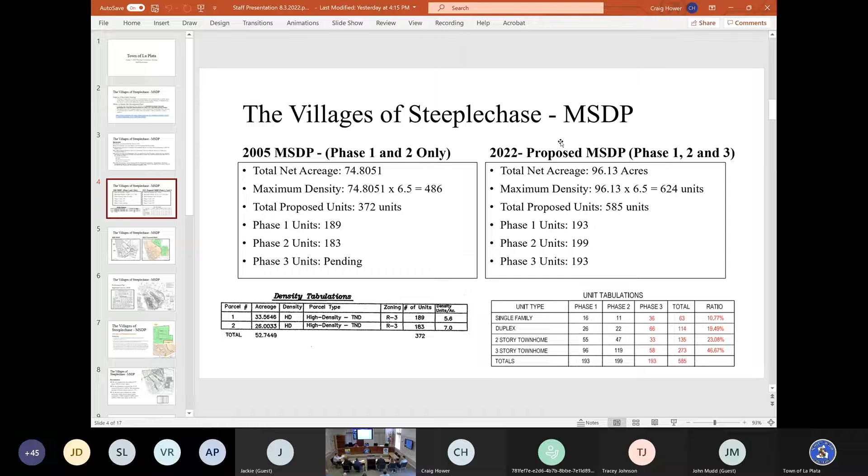Next. So here is just a visual comparison between the 2005 Master Site Development Plan and the 2022. You can see that they did add the 9.48 acres into the overall phase 3.

You show them where that actually is, or Phase 3 is? This is the 9.48 acres, shown in green. This was purchased to make this all one contiguous piece of ground.

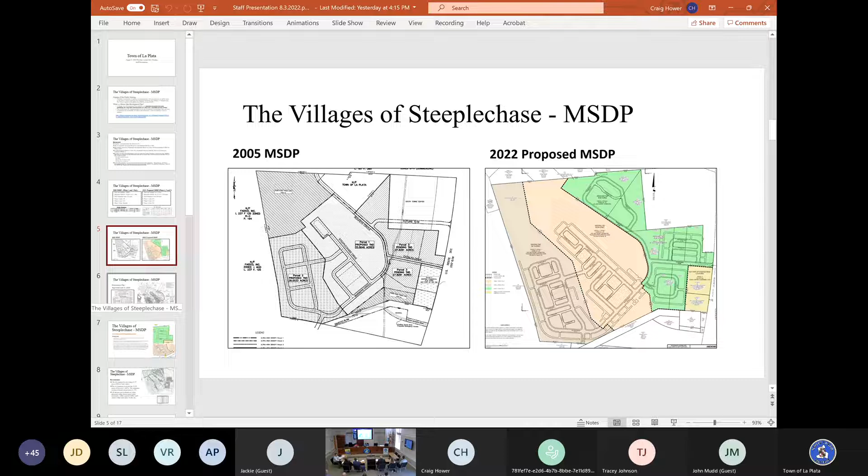Sorry. No, you're fine. There's just a delay with the online. And I don't want to get ahead of anyone that's virtual.

There we go. So this is the most recent preliminary plat that was approved for phases 1 and 2. I just wanted to show the overall, which was approved on June 5th of 2018. So again, it just highlights the 50% rule for the dwelling units and lays out the prior 2 phases.

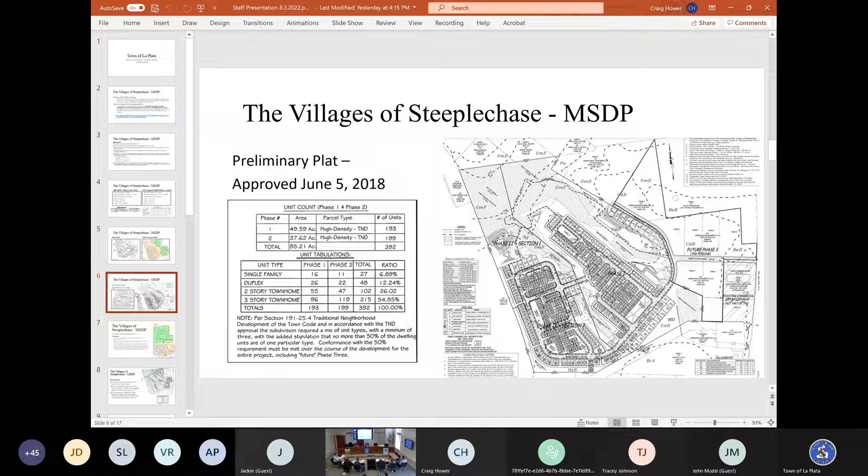It's a work in progress, hybrid meetings, it's all new.

We're getting there. Okay, so for the Villages of Steeplechase, I wanted to highlight a few notes on transportation. For US 301, which is where their main entrance is off of Catalpa Drive, that is owned and maintained by the Maryland Department of Transportation or State Highway Administration, and they have full access or full maintenance over that intersection.

So they are the ones that would decide what could be done with that intersection. We do have interparcel connections proposed to the south through the Stagecoach development. That preliminary plat was approved on June 7th of 2022, and there is an option to connect to the north through the South Towne Centre property. So I've highlighted those 2 properties over on the right-hand side.

The town has not adopted an adequate public facilities ordinance and therefore does not require traffic impact studies at this point in time. If a traffic impact study is submitted, the town would send it to the State Highway Administration or MDOT for review. The state would review the assumptions regarding trip generations, distributions, assignments, along with any internal capture/pass-by trips claimed and determine if any mitigation was required along Route 301.

The town does not have any control over any improvements along Route 301 or Crain Highway. After talking with the State Highway Administration, they do have certain warrants for traffic signals. As was the case for Heritage Green, they generally have about 1,000 units before they would trigger a traffic signal. So with Steeplechase and Stagecoach development, we would most likely be looking at a traffic signal down off of Old Stagecoach Road.

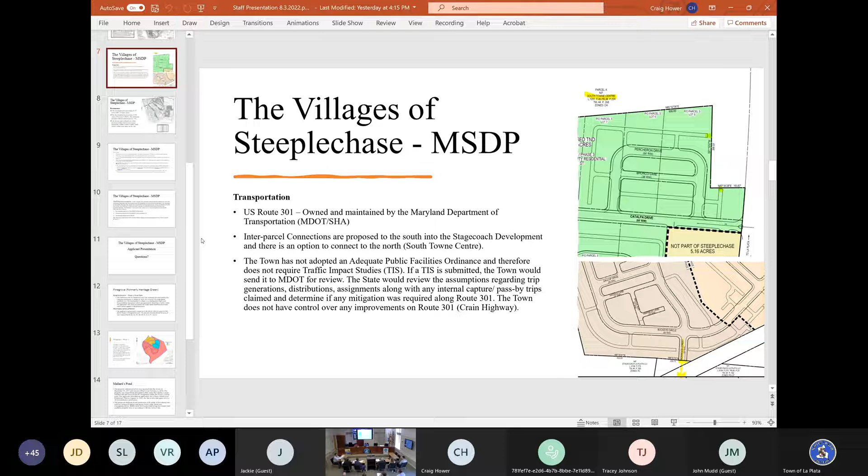And then next, I wanted to talk about the environmental features on the site, and I know that the applicant will provide some additional details as well. But here's an overall view of the site. I've highlighted in green the forest conservation areas, and then in blue the streams that go through the property. So overall, the development is providing 63.97 acres, which is 54% of the overall development as open space.

They are preserving 25.50 acres of forest. That's 21.689%. Per the town's resource protection standards and forest conservation code, the amount of forest conservation required to be preserved is 15%. All the streams and wetlands on the site are being protected with forest conservation easements, or they will be protected with the buffer yards as required.

So the next steps for the Steeplechase Master Site Development Plan is for the Planning Commission, as they can hold the record open for 30 days or close the public hearing. The Planning Commission shall then provide a recommendation to the Town Council. At a Town Council, the Town Council shall hold a public hearing and advertise in accordance with the Town Code and state law. With their public hearing, they will provide the final approval with conditions, or denial of the amended Master Site Development Plan.

If, and I say if, the Master Site Development Plan is approved or approved with conditions, the applicant would then proceed with the preliminary subdivision plat review. That is where we would get into the details of the site, the lot layout, the school seat allocation, the forest conservation specifications, stormwater management, et cetera.

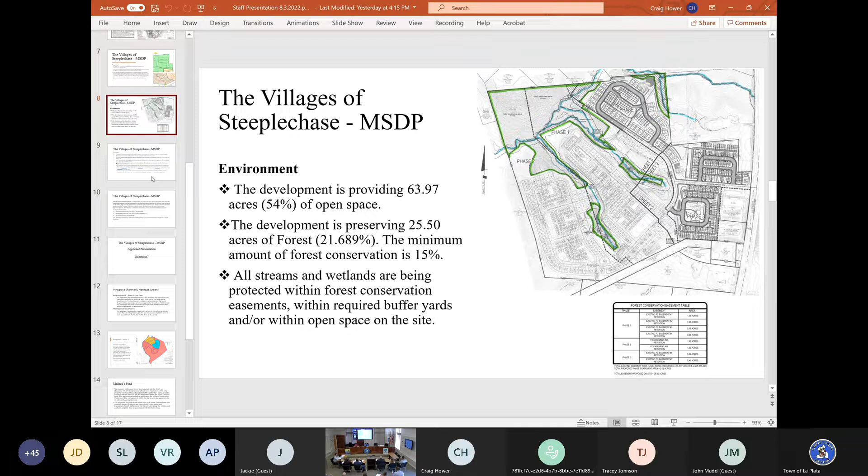So the staff recommendation is, at this hearing, the applicant shall present the application and offer supporting testimony and documentation as the applicant deems necessary or desirable. The members of the public shall have the opportunity to comment on the proposed plan. At the conclusion of the public hearing, the Planning Commission shall consider the application and make findings and recommendations.

The Planning Commission must make one recommendation based on the following three choices: recommend approval of the Master Site Development Plan as presented, recommend approval with conditions, or recommend denial of the Master Site Development Plan. The Planning Commission shall then transmit both findings and recommendations to the Town Council for action.

So I think I'd like to start with Ms. Flerlagi. Ms. Flerlagi is in the unique position of having been the planning director for the town when most of these approvals were given to this project. I'm just going to lead her through some discussion about the zoning, not too much like court testimony. Ms. Flerlagi, could you state your education and experience and your qualifications as a planner and a zoning expert?

Good evening, ladies and gentlemen. Currently I'm employed at Soltesz Incorporated, an engineering firm up in Waldorf. My full name is Kathy Flerlagi, and I function as the senior planner for the Waldorf office. I do most of their environmental planning and entitlement work specific to zoning map amendments, plan development, text amendments, and that sort of thing. And as Mr. Scott stated, between 2004 and 2011, I served the town of La Plata as their planning director, their first planning director.

And Ms. Flerlagi, you also have some planning and design related qualifications, licenses and certifications? Yes, like Ms. Harrington, I'm a certified planner, AICP, that's the American Institute of Certified Planners. It's a professional registration that comes with a code of ethics. Also, I'm a qualified professional under the COMAR regulations. I'm able to prepare forest stand delineations and forest conservation plans, in connection with the state requirements and forest conservation ordinance of the town of La Plata.

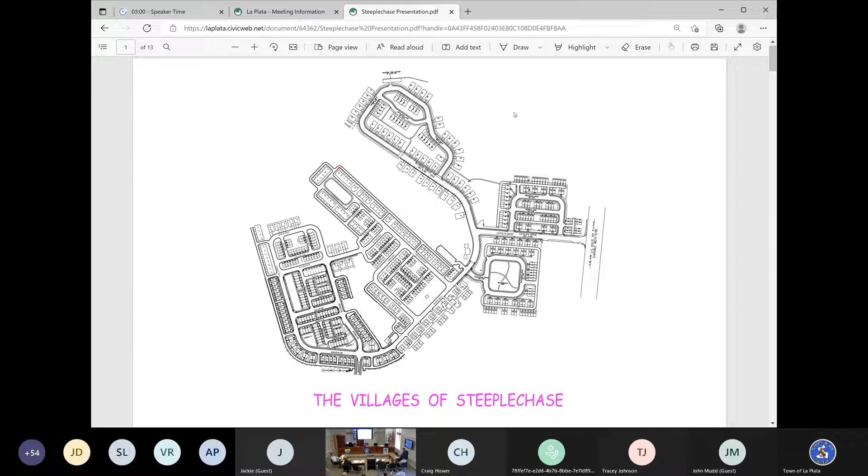Removing the two exits on Catalpa Drive. Can you give me my next slide, please?

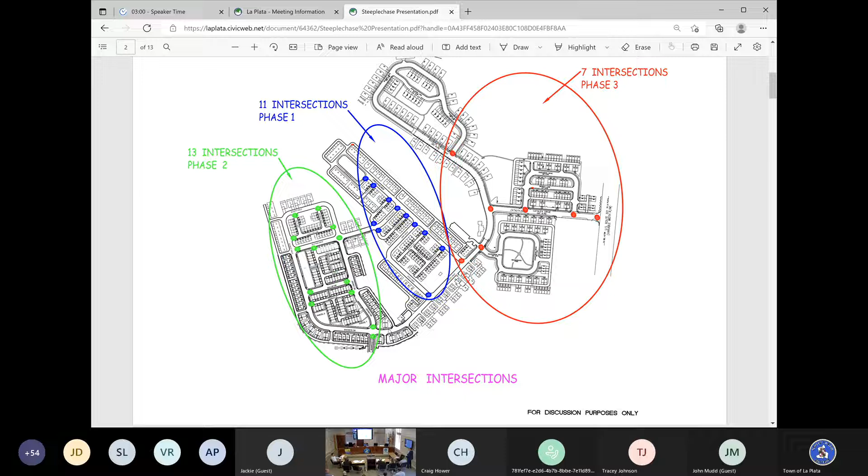So I took what they did, and these are the 7 intersections on phase 3. There is a concern that I've created too many intersections. I have to chuckle. They want me to create other intersections out to 301, but they don't want me to create internal intersections, which is the whole part of a TND. If you take these 7, and I'd argue this one should really be in phase 1, there are actually 6 intersections in phase 3. In phase 1, there are 11 intersections. In phase 2, there's actually 13 intersections. The land plan is exactly what a TND concept is, interconnecting driveways to do this. So I believe we fulfilled exactly what we had intended to do.

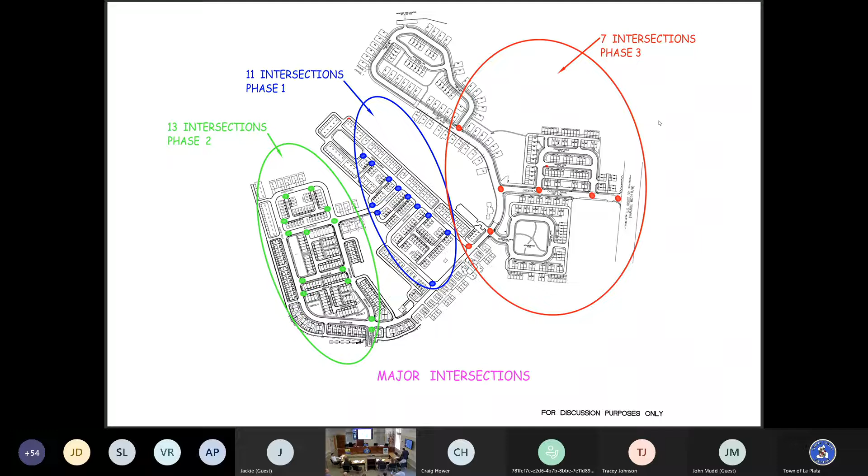Incorporating more courtyards, pocket parks, and amenities for children to include tot lots. Can you go to my next slide? So, go back one.

So I read that and I thought, did we really do a poor job? Kathy, did you all do a poor job from a land planning perspective? And I said, I really don't think we did. So I took this, this is phase 2, and then I compared it to all of phase 3. If you look at phase 2, go to the next slide please.

Phase 2, the pocket parks, and this is for discussion purposes only, I can't tell you I got down to the correct inch, but it's interesting. Phase 2 has 56,210 square feet of open space park area.

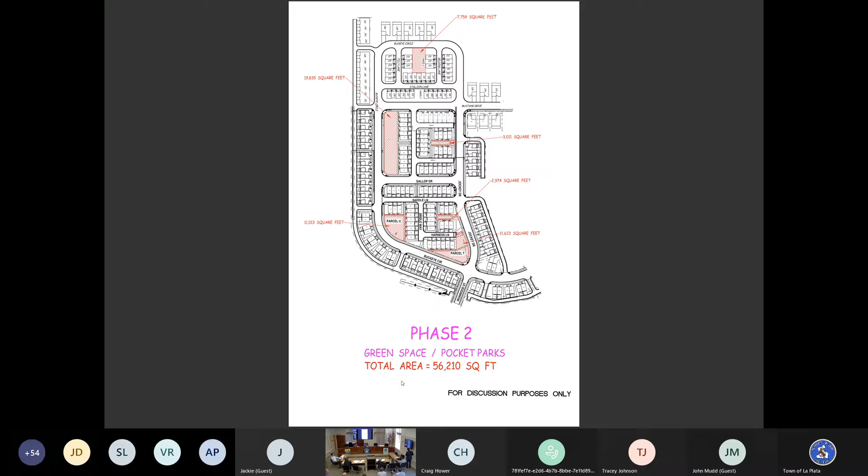Go to the next slide. Phase 3, with this huge open area here and the pocket park, the way we designed this around the single families and the villas, actually has 109,852 square feet of open space. Again, from a land plan concept, I think we've done a good job. I think we took into consideration, instead of very long linear pieces of property, having 3 different separate pods, and we've created open spaces within those.

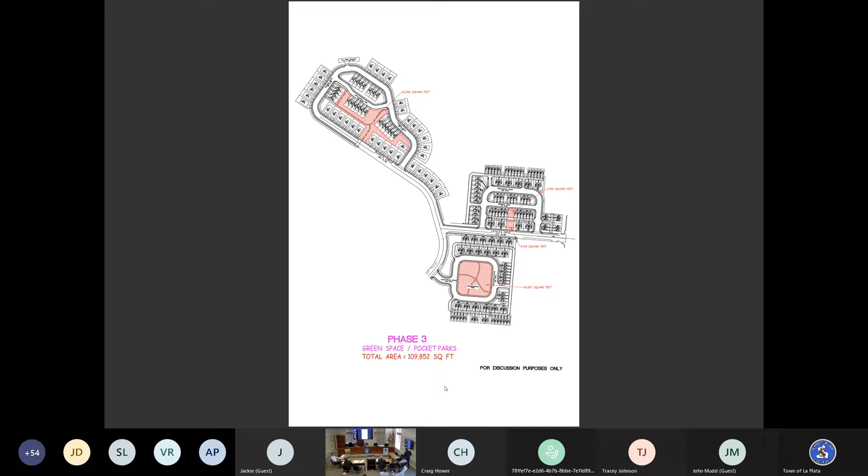Relocating the stormwater management ponds to a less conspicuous area. Next slide, please. And next slide, please. Oh, actually, I'm going to go back one slide, please.

The next thing I did, there's always a discussion about this being too intensified of a development. We have 56% open space in this community. I was looking at this and trying to come up with some way to visually show someone what I think from a land plan we tried to do. So here are all the single families and these villa homes that I've put down to assist the single families in this area.

So there are 59 lots here. Go to the next slide. So here are the 59 lots down in that pod 3. And this is all of phase 1, which is 193 lots. This is 59 lots.

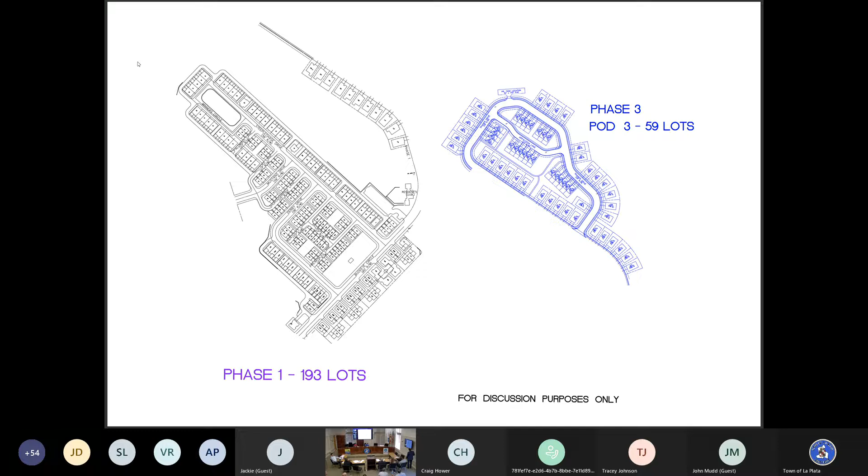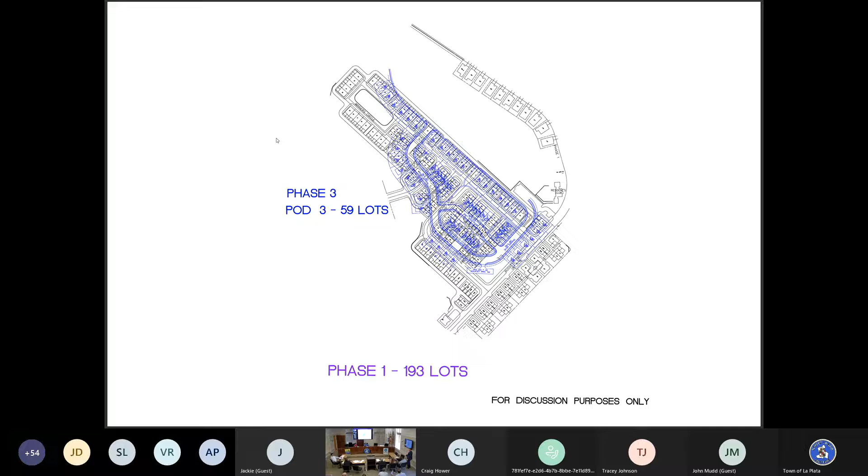Go to the next slide. So I overlaid those 59 lots over those 193 lots. It shows that I built 193 lots on this parcel, and in phase pod 3, which is almost the same size, I'm only building 59 lots. It's actually less intensified than normal.

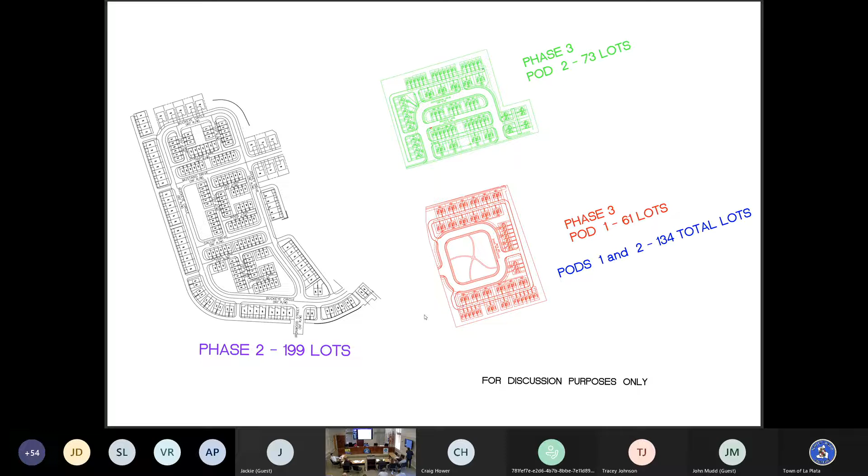Go to the next slide. I basically did the same thing with the other 2 pods. This is the pod coming down Catalpa, and this is the one on the other side of Catalpa. So I took those 2 pods, which is 134 lots, and I overlaid it on phase 2.

Again, here's phase 2. I put 199 lots on it. I'm actually only putting 134 lots on this one. The argument that I'm doing too intensified of a development is just not true when you look at phases 1 and 2, incorporating more single-family homes and villas.

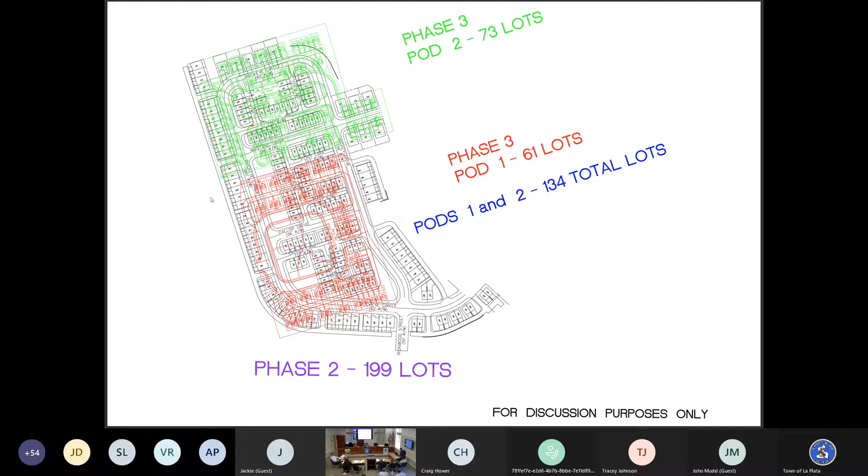Next slide, please. Actually, excuse me, stormwater management. The current preliminary proposal is to have stormwater management ponds down here. They're the obvious place to have a stormwater management pond. It's the lowest area. This is where all the water comes down. This is where the town wants it, and this is where they should be.

The town currently does not have a requirement for a fence around a stormwater management pond. If you want me to put a fence around these ponds right here, I'll be happy to meet with anyone here. Tell me what type of fence you want, I'll put it up for you. But the town doesn't require it. I believe Kathy would tell you there are several other communities around the La Plata area that have not put the fences up, and they're more of a feature without the fence. But if you, the community, want a fence around it, I'll put it up for you.

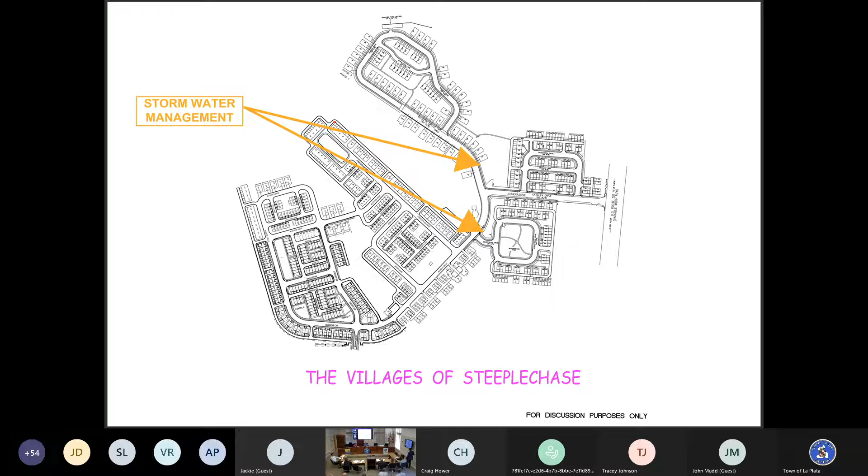Next slide. Incorporating more single-family homes and villas. In this whole area, I've done 25 single-family homes, 25 out of 392 units.

I was aware of these single families over here. I tried to plan around that for you. I put 36 single families down in this area. I'm doing 18% single families in phase 3, where I've done 5% in the whole community. I'm tripling what I've done in the past. And these right here, and you asked me to do single families and villas, these are villas right in here. So actually, I've already done what you're requesting me to do. I was cognizant of it, and the land plan showed that we did it that way.

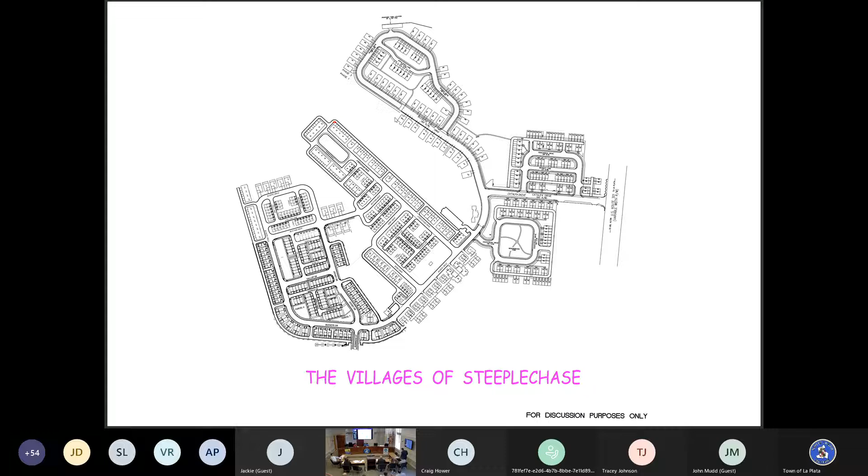Implementing parking alternates. Can you go to the next slide? When I was going through this call to action, which again was an excellent presentation, but I think there's always a different side, and I think there's another argument to it. One of the things, they showed pictures of someone parking sideways in their driveway. The T&D ordinance allows us to do driveways as short as 8 feet. In phases 1 and 2, I never did a driveway less than 13 feet.

And when you put a car on it, some of the people do park a little bit sideways on it. I recognized that over the first two phases. And when I went to Soltes and was doing this design, we did an analysis of all the driveways in phase 3. They're ranging from 17 to 35 feet. So again, we're trying to create more parking in the aprons than we have done in the past. We recognized it, we're trying to improve it, and I think the land plan illustrates it.

Re-engaging with steadfast commitment to establish controls. There is no one in this room that agrees with that more than I do. When I go through these pictures, and they're perfect pictures for the perfect locations, Timberlake hasn't done what I would have expected them to do from a landscaping standpoint. I have asked them to correct it. To this point, they have not corrected it.

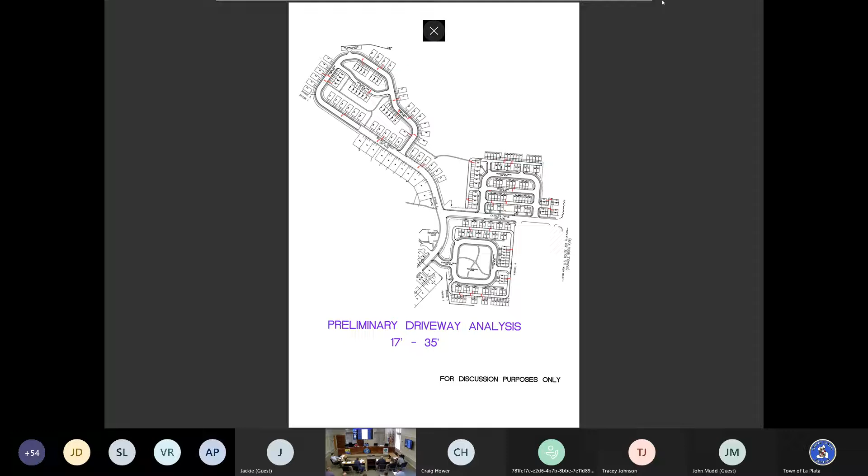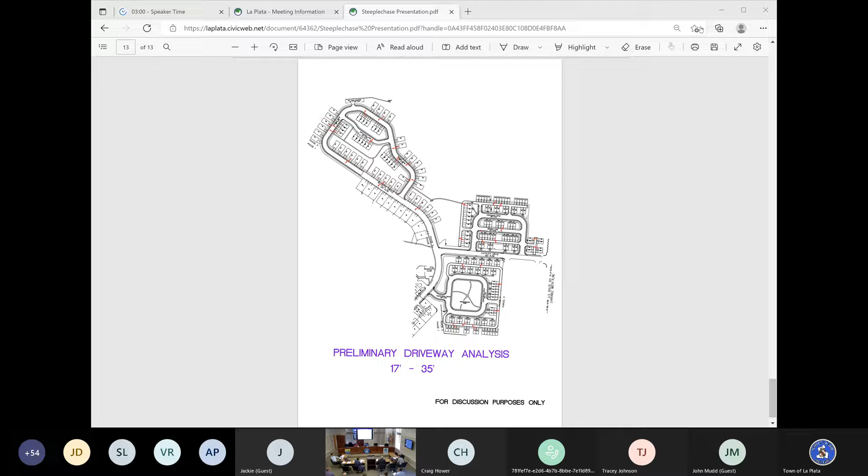In conclusion, I get it. The current homeowners in the villages of Steeplechase have their homes. They don't want more traffic, more neighbors, and less trees. They don't want to see their community change at all, and at best, they want to slow down the process. But is that fair to me, who has done everything correctly through the zoning process? I'm in the 2009 comprehensive plan. I'm in the 2020 comprehensive plan, which included the additional 9.49 acres.

I respectfully ask the Planning Commission to take the recommendation of your town staff to approve and send your recommendation back to Town Council for the amended Master Site Development Plan of Phase 3. Sorry it took so long.

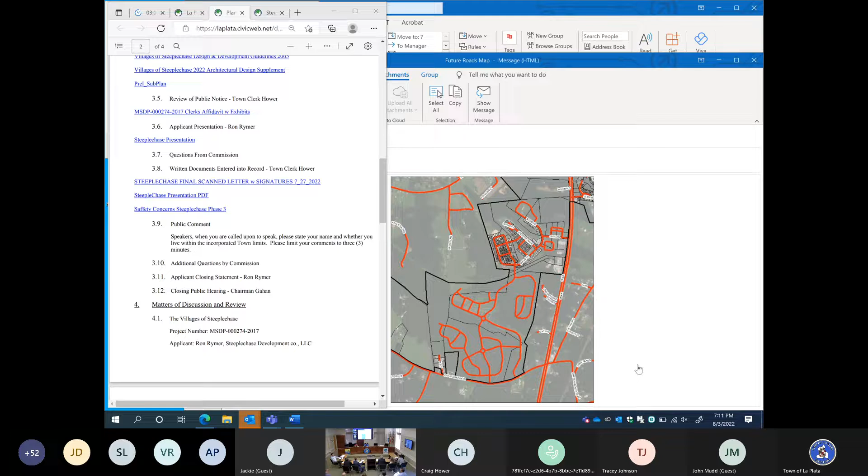I did not expect to have to answer so many specific questions at this high level of the development process, but I thought it was appropriate for me to try to respond to you and the community in regards to what you put together. And if you want to meet tomorrow, Monday, Tuesday or Wednesday, I am happy to go through this and discuss it with you. But I think, as a general rule, over the last 20 minutes I've tried to say there was thought in this land plan. There was considerations to the single families, there was considerations to having product in here. I think we've done exactly what we were always asked to do, and I think we're continuing to fulfill the agreement that we had with the town from 17 years ago. I thank you for your time.

Thank you, Mr. Rymer. Process question, Mr. Town Clerk. Mr. Rymer's presentation, at least verbally, is recorded as part of the record, but he referred to pictures too. How can we make sure they're in the record?

Everything that is being broadcast is being recorded and transcripted, so what's on the screen is what is being recorded, including the picture. Oh, the pictures that Mr. Rymer referred to are actually an exhibit provided by the, it's actually coming up underneath the written documents entered into the record. Thank you.

I would just make an editorial comment. I think a lot of times we tend to think there's some level of bad faith on the part of the business or the developer. I don't think that's the case here. I think this developer undertook a thoughtful and professional design. It is, of course, a truism that growth is never a welcome thing by existing neighbors.

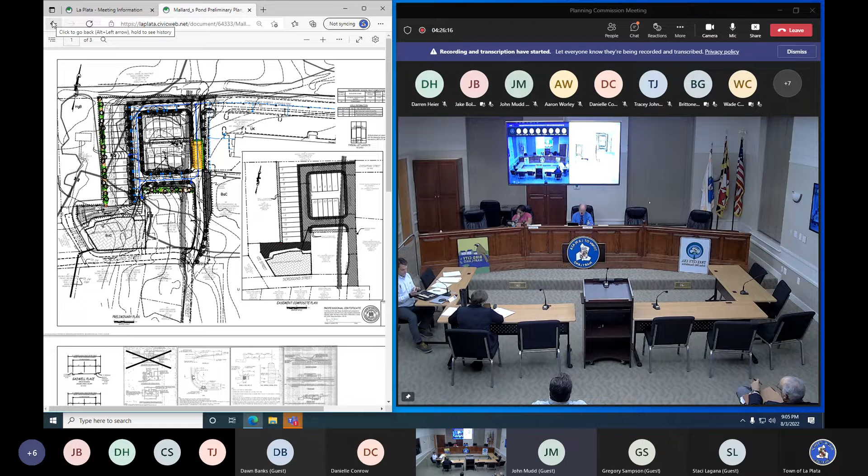Thank you, Commissioner Sampson. Any other questions or comments from the commissioners for the applicant? Okay, not hearing any, I ask the commissioners, someone to make a motion.

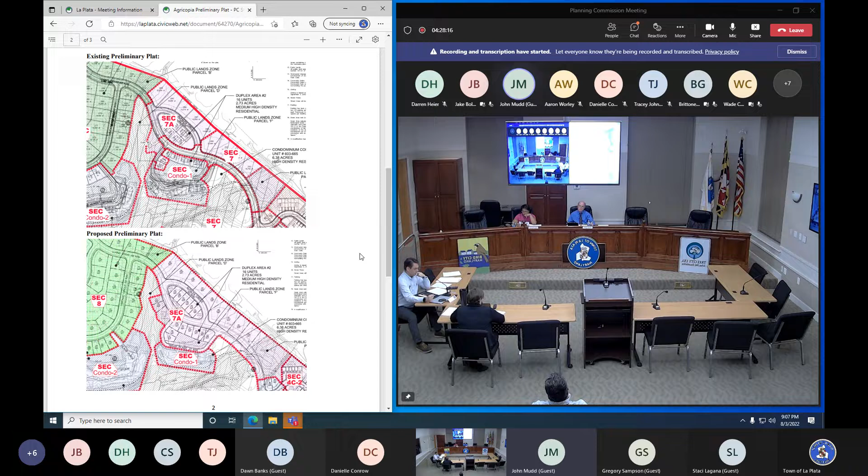As this is a development zoned PDAG, Planned Development Agricopia, any future development must be approved in compliance with the governing documents. They are not changing the density or the acreages, it's just rearranging the lots, as they noted there was a drafting error on the previous preliminary plat regarding unit counts and square footages.

We did have a comparison between the previous lot layout and the amended lot layout to show the minor differences, though I'm not sure if we can get my PowerPoint back up. It's just minor amendments to the lot layouts, basically.

Staff did review all of the preliminary plat and guiding documents to verify that no major changes, or really any changes besides the lot configuration, were being made. All other aspects of the previously approved preliminary plat will remain in effect, and we are recommending approval.

Are you on the G drive? It's not in there. Oh, did you put it in there? Okay.

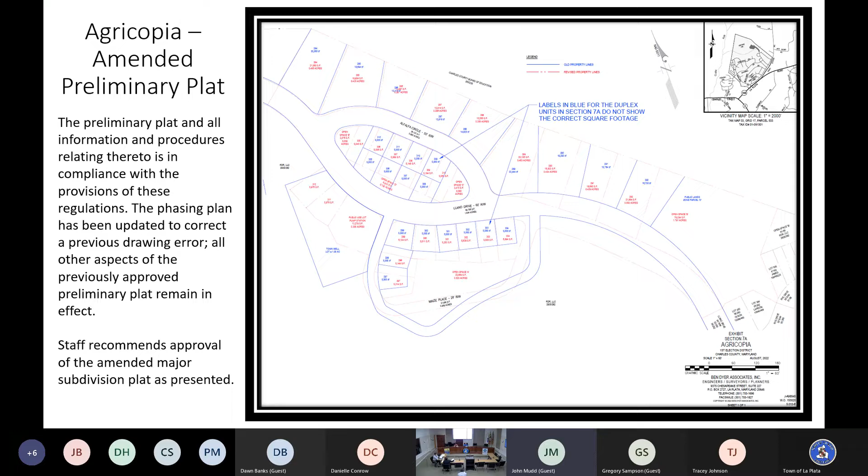How you doing? RJ Earnshaw. Is there anything you want to add, Mr. Earnshaw? No, we're sticking with the same plan we've had. What happened previously, Bolton Latham had this, and they used 3,000 square foot lots versus the 5,000 square foot required now per lot. So we just reconfigured it, moved things around to meet current standards.

Okay, any questions from the commissioners for Mr. Earnshaw or Director Harrington? This is... okay, then I would... Commissioner Johnson, sorry, go ahead Commissioner Johnson.

Director Harrington answered one of my questions, that being there will be no additional lots added. But my other question is whether the lots are being made more consistent with existing lots or added lots.

They're making them larger so they actually fit the current zoning ordinances, so we had to widen them out in that section. Near where Alfalfa Circle and Lano Drive is in that center island area, the proposed number in the preliminary plat had two more lots in there, jamming them all up so they wouldn't fit correctly and we couldn't get the driveways in. So we moved two of them across the street and opened the rest up to meet the 5,000 square foot requirement. We're not adding any additional lots, just moving them around in this section.

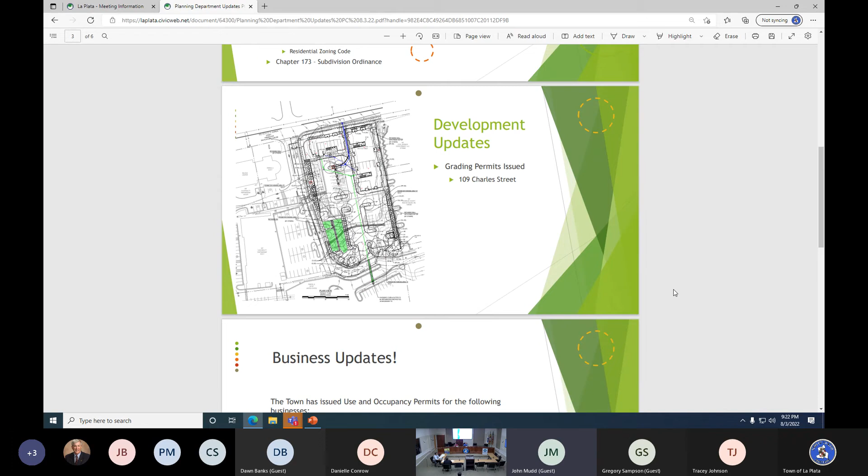Development updates: we issued a grading permit for 109 Charles Street to proceed forward with their development. We issued occupancy permits for 105 Centennial Street, Suite A, Meridian Fitness, and 115 LaGrange Avenue, Suite 102, CC's Hair Salon. Matters of information, school seat allocations.

Still working to do an updated development capacity analysis, taking into consideration water and sewer, along with school seat allocations. We did sign the authorization for our new permit software, Municity, and we are starting the initial setup for that.

Again, we have our development updates posted on the town's website. We have a monthly development updates webpage, and we have our Town of La Plata Planning Facebook page—shout out to follow us, please. We post some good information, and again, the draft code revisions that I keep talking about. If anyone has any questions, I'd be happy to answer those.